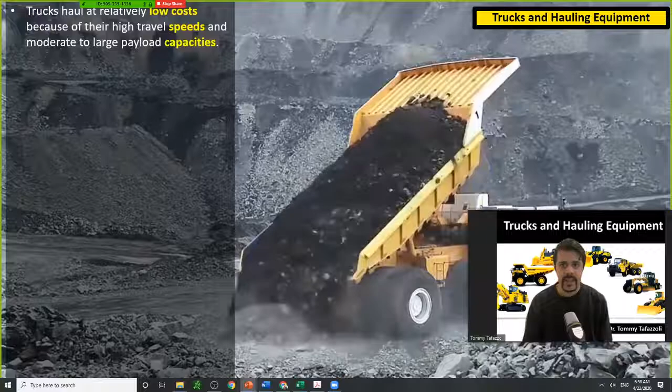Trucks are a very cost-effective hauling equipment due to two reasons: one being their relatively high speed, and two being their relatively high capacity. So they can travel fast and they can haul a lot of load, which makes them very popular in earthwork operations.

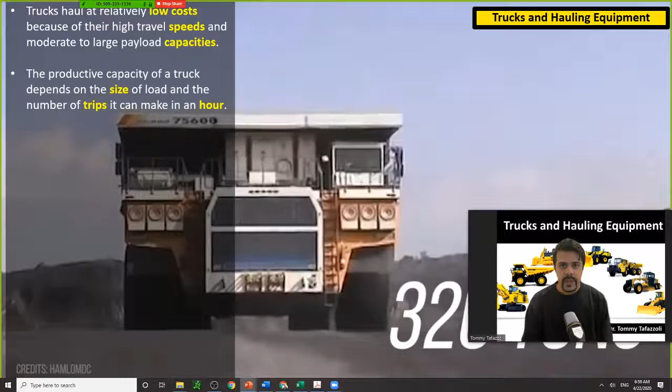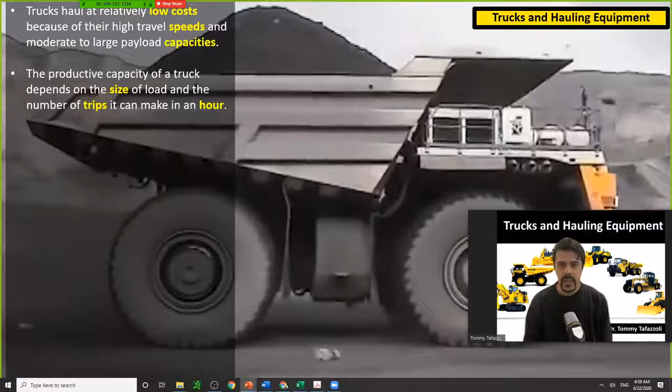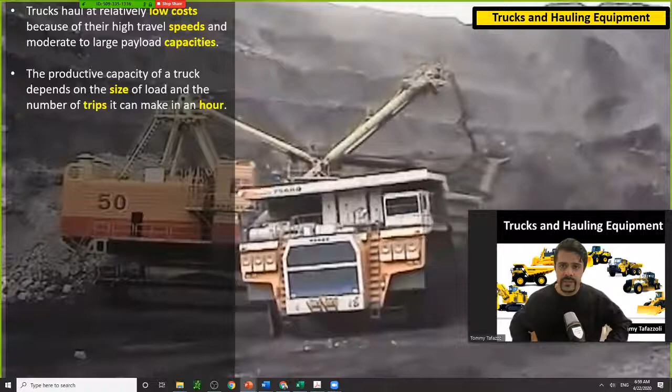The productive capacity of a truck depends on two things: one is the size of the load, which affects how many cubic yards you can process per hour, and two is the number of trips a truck can make in an hour. Based on the size of the cargo box and the number of trips, you can estimate how many cubic yards of load the truck can haul in an hour.

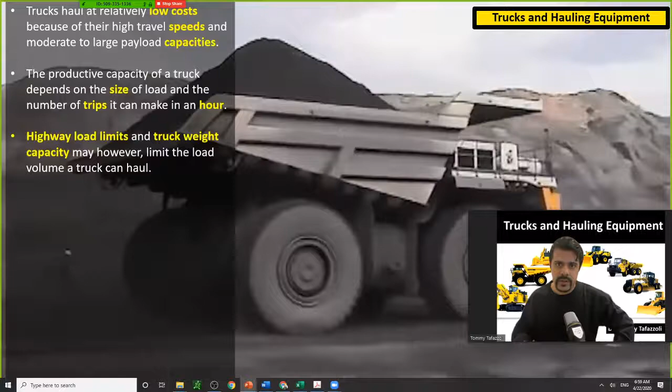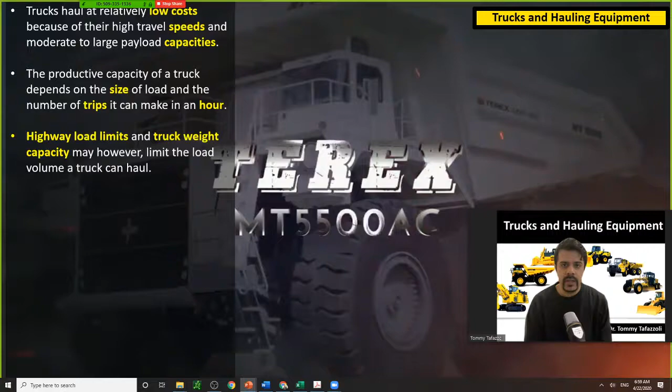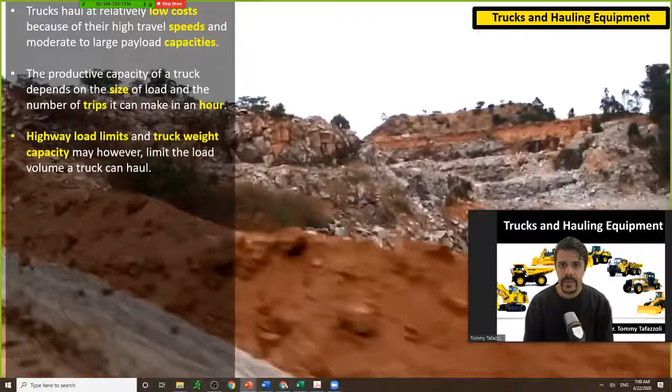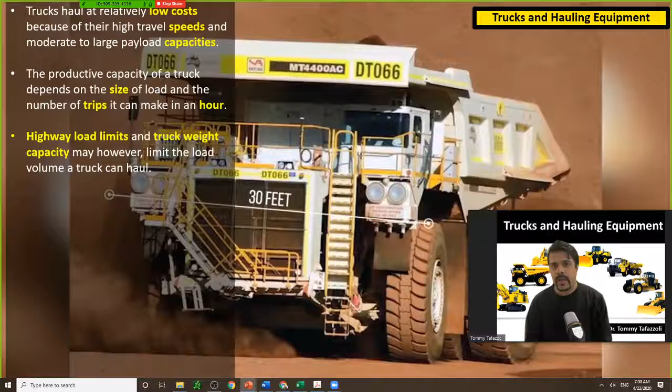There are some limitations. Even though your truck has a lot of capacity, it doesn't mean it can move on any highway, because highways have load limits you have to comply with, and there's also truck weight capacity, meaning the truck cannot get heavier than a certain number. You are limited by those numbers, even though volumetrically you could load your truck for a higher number.

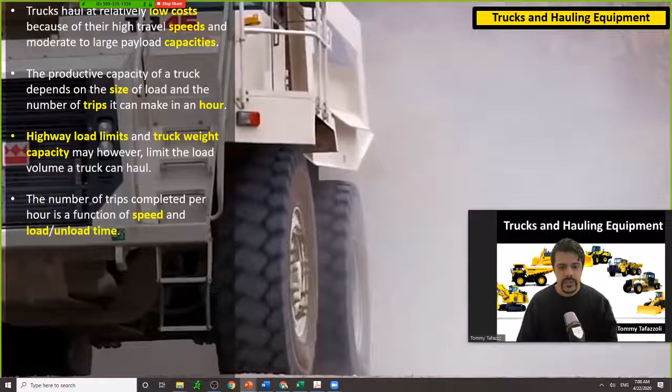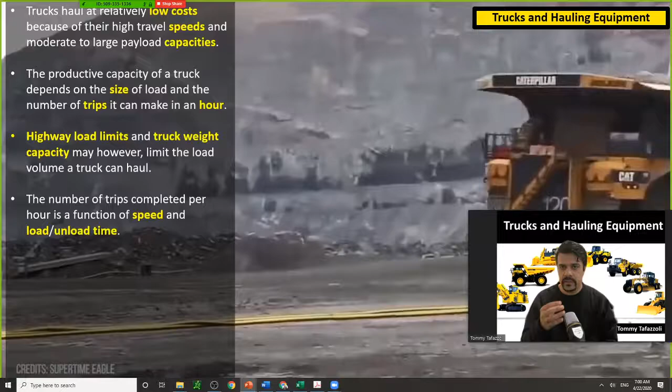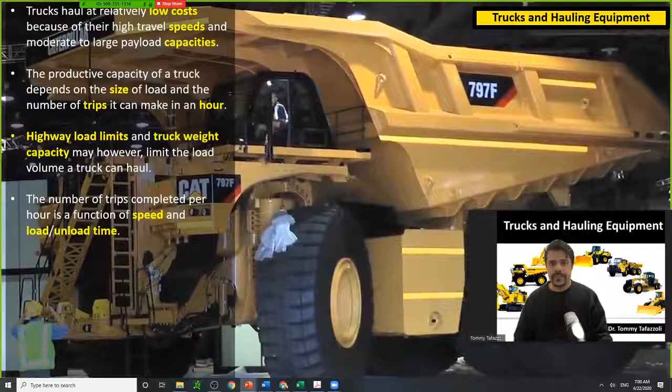The number of trips completed will depend on the travel speed. As a hauler, the truck has to travel, get loaded, travel back, and dump the load. So travel speed is one item, and of course the loading and unloading time is the second item of a cycle time.

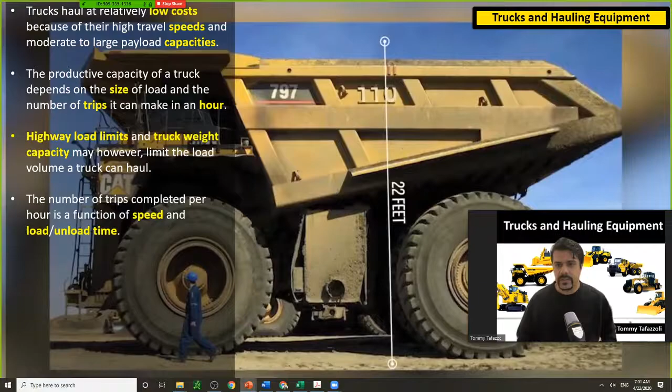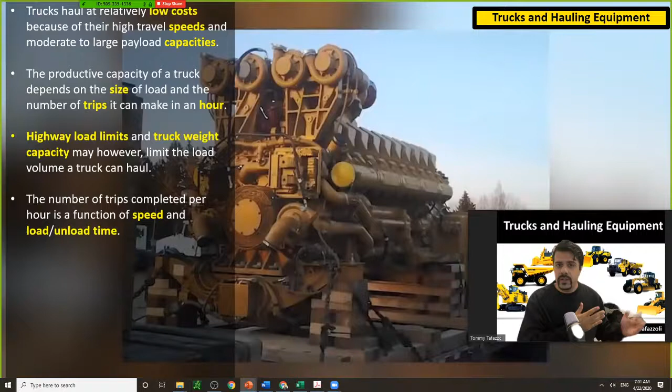The cycle time is basically: going to load, the loading, then traveling to unload, then dumping the load, and then returning to the initial location.

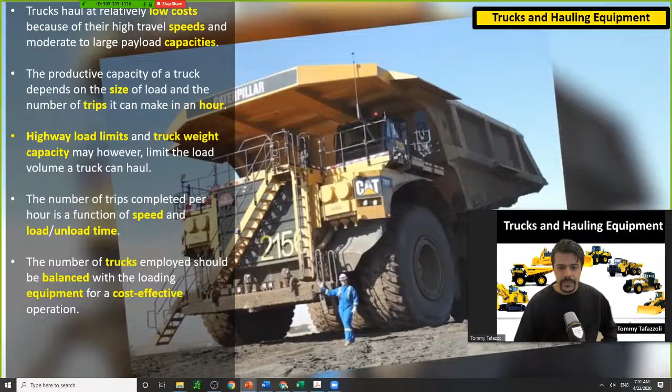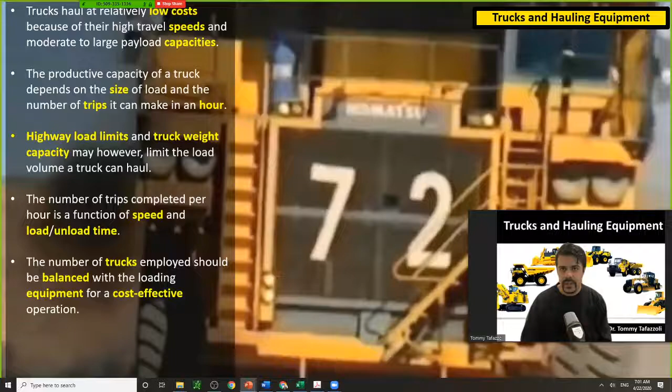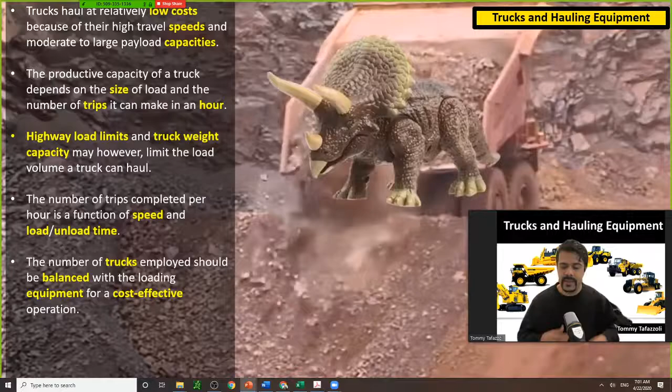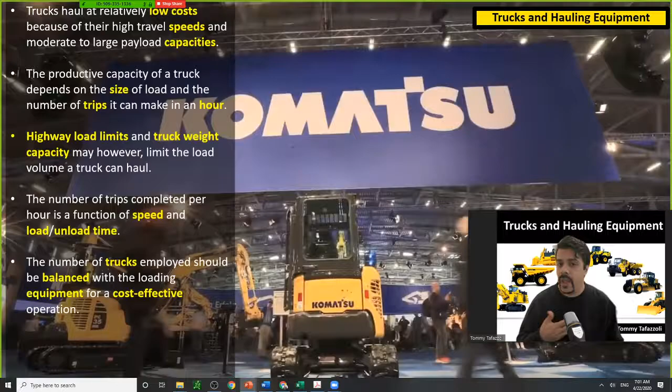The number of trucks is a big question for a contractor or project manager - they're interested to know how many trucks they would need. The best case, the optimum condition, is where your loading and your trucks are balanced so that your loaders are working at all times and your trucks are working at all times, and your equipment doesn't sit idle, because you're paying for them. Effectiveness means having your equipment functioning at all times.

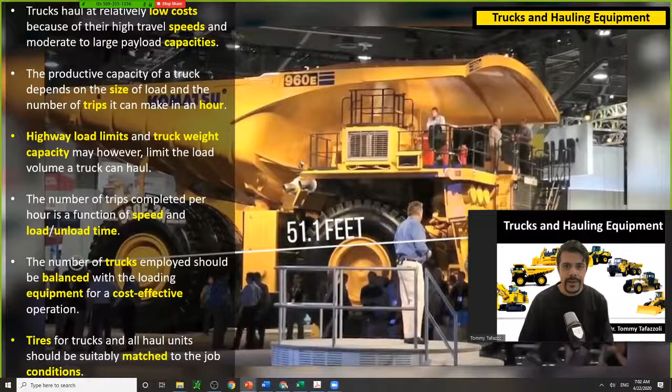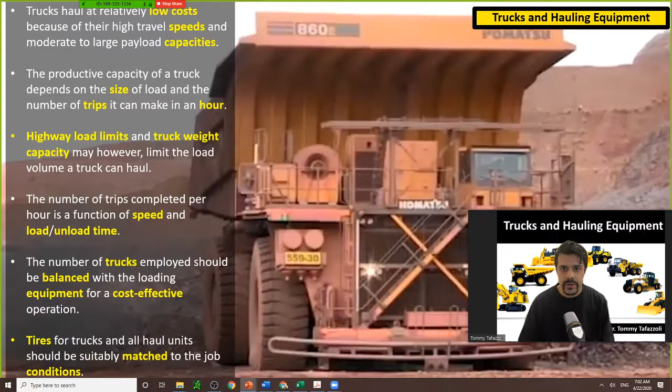Tires are a very expensive part of trucks. They include 35% of the maintenance costs of a truck, so you've got to be careful about your tires. Taking good care of the tires is primarily dependent on the amount of load you put on your truck, and that load should also match the site condition.

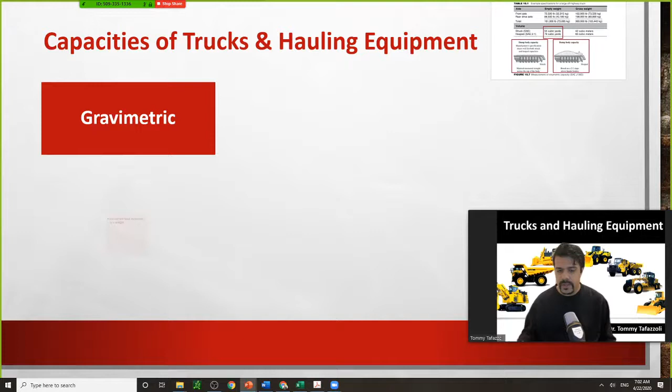Capacity of trucks and other hauling equipment could be presented in three different ways. Gravimetric means the load - if you weigh the load that is on the cargo box, how much will it weigh. But they could also be computed based on volume, in which case we have two different situations.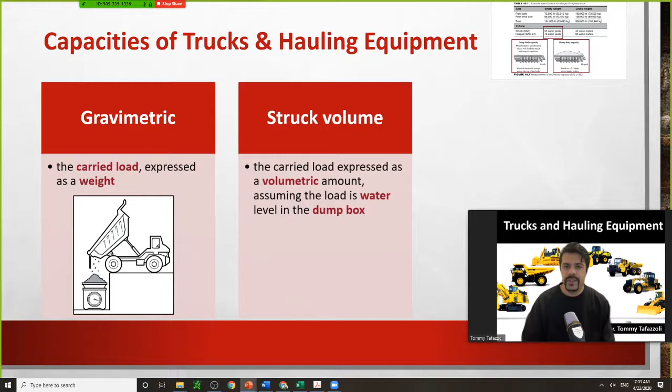If you remember, it's the same story we had for filling the bucket of a loader. The cargo could be considered a struck volume, which is when the load is level with the top edge of the cargo box. However, you can go for more - you can load your truck with the heaped volume, which is when you have extra load on top of the edge of the cargo box, and in that case you'll have a 2-to-1 slope above the dump box, and it will look like this.

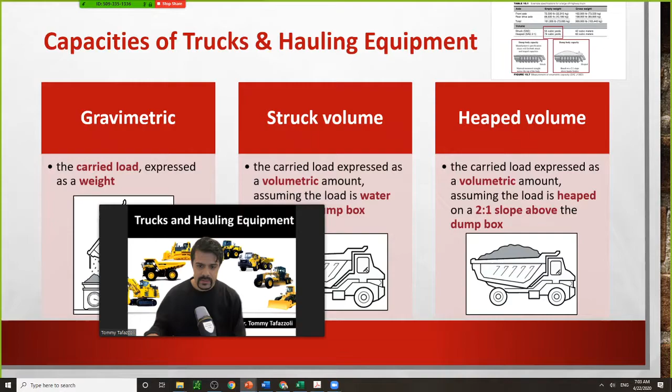There are tables that tell us the volume in different situations, struck and heaped. If you take a look, 55 versus 79, or 42 cubic meters versus 60 cubic meters, it means heaping the truck can significantly increase its capacity - as you can see, it's almost 50% more. The heap volume can be significantly higher than the struck volume.

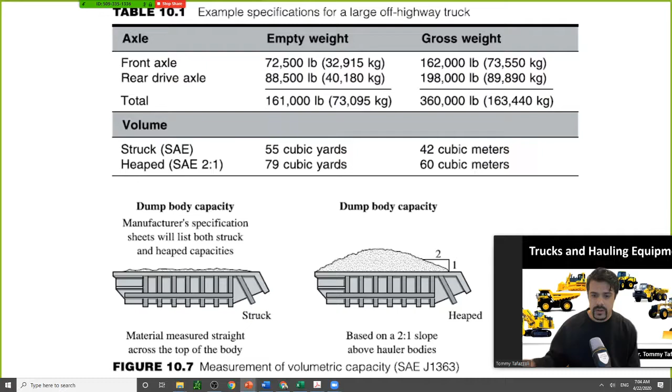So does that mean we should overload the truck as much as we can to make it cost effective? There are some reasons that tell us why we should not overload a truck. Number one is that when you overload a truck, there will be a lot of pressure on the tires, and this will create extra temperature on the tires. When that happens, the tires will get permanent damage, and obviously, when this happens, the operating costs of the tires will increase.

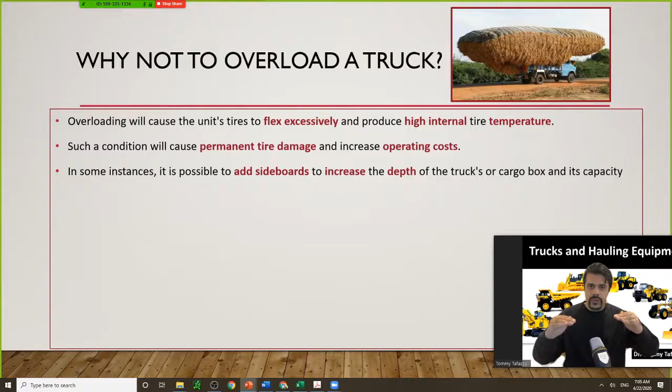So also, to add some capacity to your truck, you could heighten or increase the height of the sideboards. Sometimes they are adjustable, or they are removable and replaceable. You can add sideboards to increase the depth of the cargo box, and obviously the capacity of your truck.

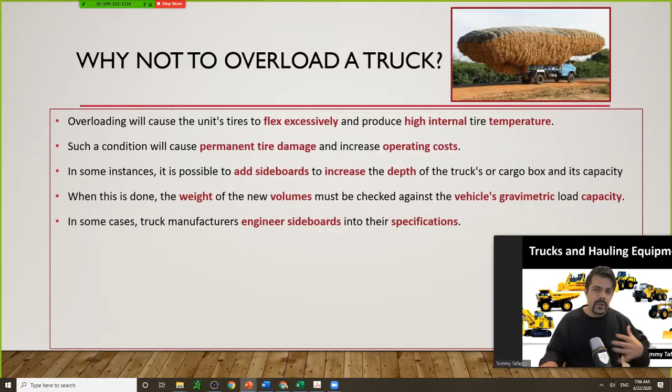When you do that, there is a limit. You should be careful that the weight of the volume does not exceed the vehicle's gravimetric load capacity. So in some trucks, the manufacturer will provide detailed information about adding or removing the sideboards,

and the maximum amount of load that is allowed when the sideboards are added. So if the added weight is greater than the gravimetric capacity, then most of the time your solution is not cost effective.

It means although you are adding to the capacity of your truck, you're not being cost effective. Why? Because you are adding fuel consumption, the cost of reduced tire life since your tires wear out sooner, and frequent failures of the machine - for example the axles, springs, brakes, and transmission could all wear out sooner, and that's additional cost for you.

But sometimes the additional cost on tires is marginal, while loading a higher amount of materials per trip could significantly lower your costs. That could justify the additional cost you are spending on tires. This is especially true where the hauling distance is long.

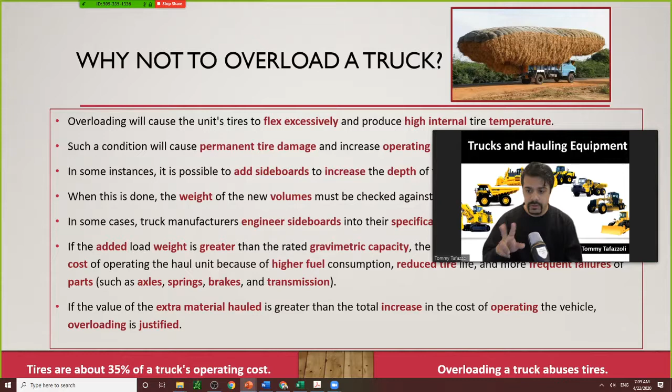So keep in mind that tires are about 35% of a truck's operating cost. That's huge, right? More than a third of operating cost for a truck is for its tires. And overloading a truck abuses tires. So these are the two important elements about overloading.

So many times you ask yourself: should I use smaller trucks or larger trucks? Obviously the number of trucks will depend on the capacity of each truck. If you have larger trucks, you will need fewer of them. But there are some disadvantages with each choice. Let's take a look at the disadvantages.

If you have a small truck, obviously you will need more trucks, and that creates labor cost for you, and loading issues, because a small target for the excavator operator will be available. It's a small box, and the excavator operator will have to spend time adjusting the bucket when dumping the load or loading the truck. Where you have a big or very large cargo box, the excavator has a lot more freedom to dump the load, so it could decrease the cycle time.

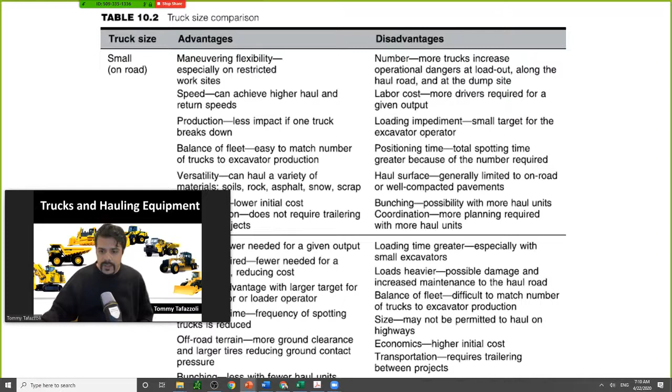Okay, so I'll let you read this chapter, this table. It explains some of the advantages.

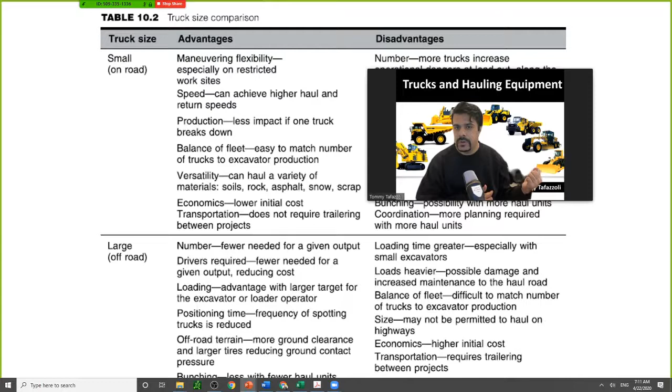Let's take a look at some of the disadvantages of large trucks. Loading time for them takes longer, especially with small excavators. So although you are spending a lot of money to use a bigger truck, the second truck has to keep waiting - the truck behind the one getting loaded has to wait longer, because if you don't have big enough loaders, that can proportionally increase the time of loading.

Does that make sense? Let's say you have a very large truck but small loaders. They have to dump a lot more buckets to fill the truck. And you're not working with only one truck - there's a queue for trucks. The second truck and the third and however many are waiting for the one getting loaded will have to wait longer, and you're paying for those big trucks. So this makes the process not cost effective.

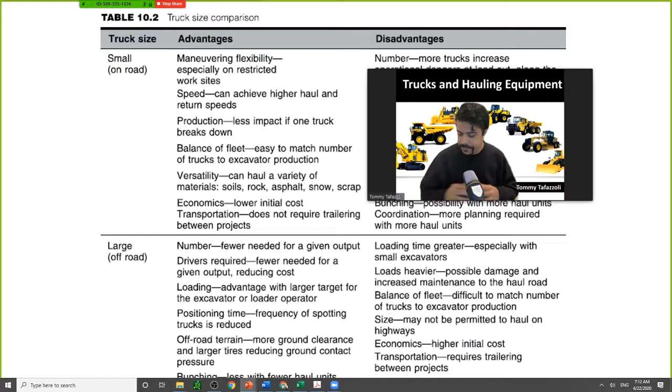All right, let's do a problem together. A loader operating at 107 cubic yard per hour - that is the cycle time of the loader, not the truck. First we need to find if you are matching the number of trucks. If you're given the responsibility of finding the efficient or cost-effective number of trucks, the first thing you need to do is find the loader production, which is given to us as 107 cubic yard per hour.

The loader has a 2.5 cubic yard heaped capacity bucket. So each time it loads the truck, it will unload 2.5 cubic yard of materials. It has a 1.2 minute load cycle, so it takes more than a minute for the load cycle of the loader.

The trucks have 11 cubic yard capacity and a 30-minute dump plus haul plus return time. So we have all the elements of the cycle time for the truck and for the loader. A 95% fill factor applies to the loader, so not the entire 2.5 cubic yard capacity will be utilized - 95% of that will be utilized. And the project works 50 minutes per hour, so we consider 10 minutes in each hour not efficient minutes.

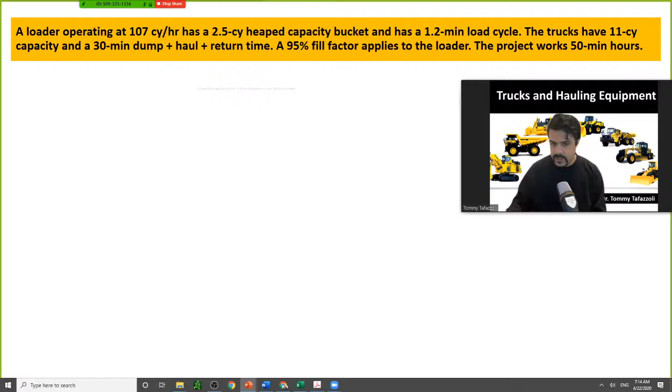So let's solve this problem together. First, you need to find the number of buckets that can fill one truck. Since you have the capacity of the truck cargo, which is 11 cubic yard, and the capacity of the bucket, which is 2.5, by dividing that you can find the balanced number - how many buckets in each cycle you're using. That's 4.4 if you do the math, but you round it down to be on the safe side, so let's say four buckets, and that compensates for the fill factor most of the time when you round down.

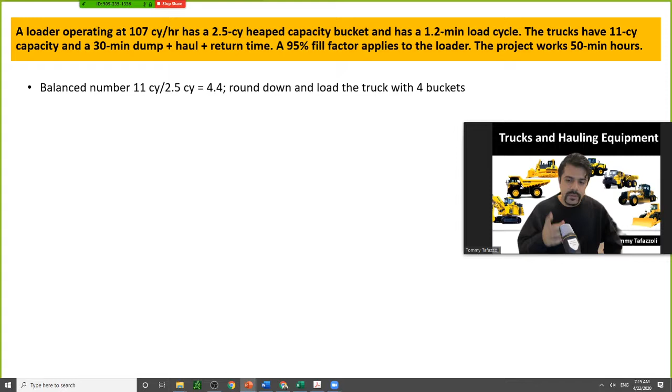Yes, you might say only 95% of the bucket is getting filled, but you round down. And also, in another part of the problem, we take 95% into consideration. I'll show you that in a minute.

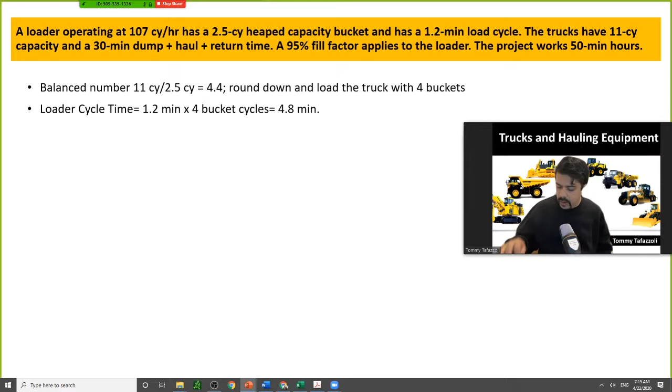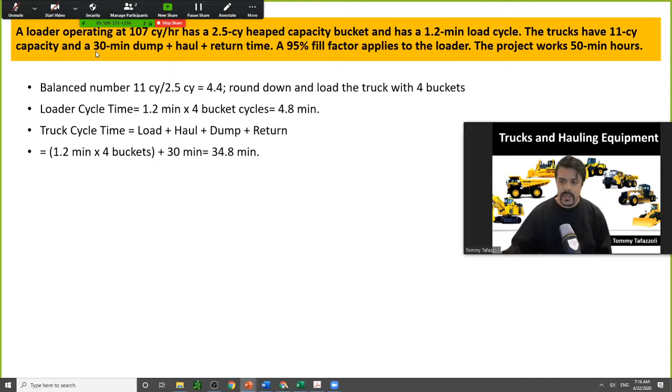So for loader cycle time: the loader takes 1.2 minutes for each bucket, and we know we are filling 4 buckets. So that would take 4.8 minutes for 4 buckets to be unloaded, or to load the truck. Truck cycle time will be the loading plus hauling plus dumping plus return time. That's 1.2 minutes times 4 buckets - we already found that up here - so we know 4.8 minutes is the time it takes to load the truck, and the haul plus dump plus return was given to us as 30 minutes.

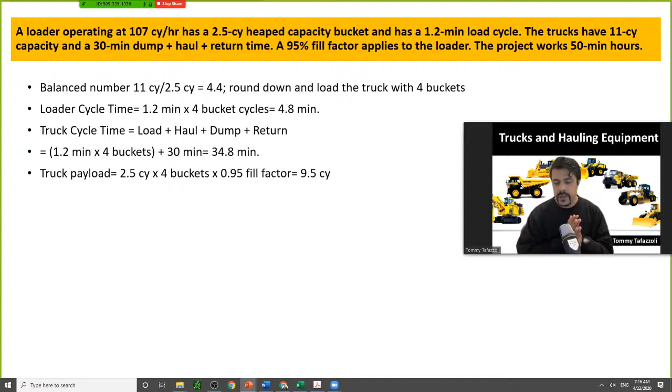So if you add them up, one cycle of the truck would take 34.8 minutes. The truck payload is where you consider the fill factor. We had a 2.5 cubic yard size bucket for the loader, and there will be 4 buckets - in one cycle you could do 4 of them, but with 95% of the bucket filled. This is the amount that you are hauling in every cycle by your truck. You have 4 buckets, each one being 2.5 cubic yard, but 95% of your bucket will be filled, so the entire amount in one cycle for the truck would be 9.5 cubic yard.

So truck production is how many cubic yards you can haul in each cycle - you can haul 9.5 cubic yard per cycle. How many cubic yards you can haul per hour will tell you your production. So in each cycle you can do 9.5, and each cycle also takes 34.8 minutes. You should divide those two numbers, and you should not forget the adjusting for efficiency.

Only 50 minutes out of 60 minutes is being efficient, so you multiply it by this number that will reduce the production because of losing 10 minutes. The answer would be 13.7 cubic yard could be hauled by this truck in every hour. So that's the production.

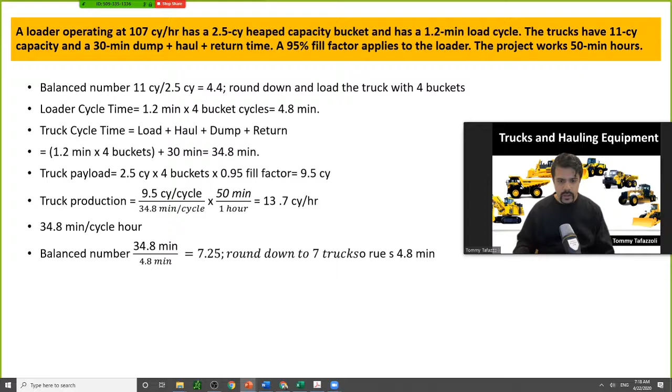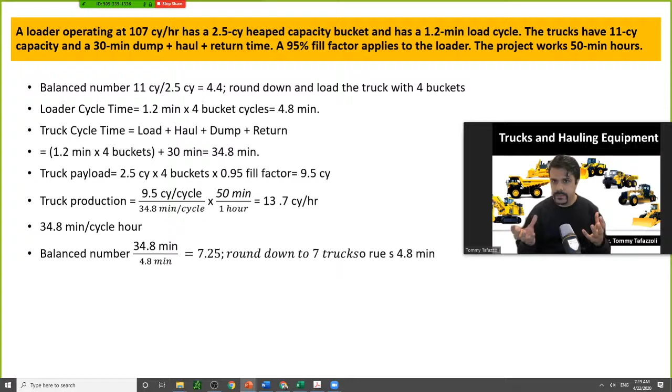Now let's balance the number. We found that loading takes 4.8 minutes, and the entire cycle time is 34.8 minutes. If you do the math, it takes 7.25 - you round it down because it's close to 7. It takes 7 trucks to match the loading time, to match the loader.

So each truck added to the job will increase the production by 13.7, because we just found that each one truck can do this amount of load in every hour. However, the loader will control and limit the total job - if you have a lot of trucks, the loader will not have enough time to load them. So we just try different numbers. Let's say if we have 6 trucks, each truck can haul this much load.

And if you have 6 of them, this is the entire total amount you can haul per hour. If you go with 7, that would be this much. If you go with 8, that would be this much.

So as you can see, we found number 7 to be the optimum number. Why? Because once you reach 8 trucks, the amount that needs to be loaded on the truck is 109.6 cubic yards per hour, but we know the loader can only do 107 cubic yards per hour. So your additional trucks will be useless.

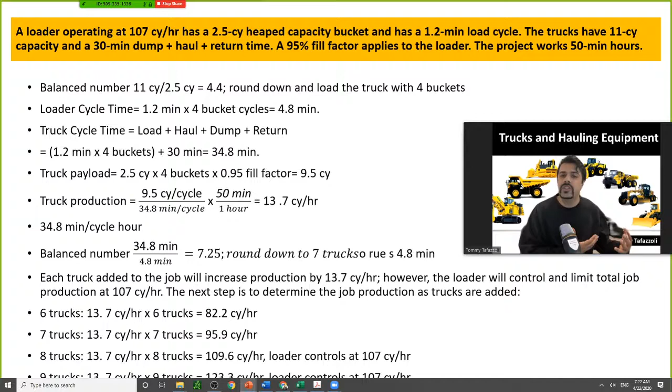This is not actually part of the problem, we just checked what happens if we pass 7 trucks. It would be between 7 and 8, but if you go with 8, that will exceed the capacity of the loader's production, so your loader will sit idle with 8 trucks or more. And with 6 trucks or less, your trucks will sit idle, because the loader is busy with the previous one and the second truck has to wait for the loader.

All right, so let's talk about truck safety as the last part of this lecture.

It makes sense that you do a hazard analysis or assessment every day, because every day your site condition might be different depending on the people, the equipment, the congestion on the site, and the operations you're doing. You should ensure that the operators and drivers are aware of the hazards. For example, today we are doing this operation at the north side, or the soil stability could be compromised due to XYZ. You should explain that to the operator and driver, so they have a good understanding of the hazards every day.

Every day that they are on the job site, ensure berms are adequately built to prevent trucks from exceeding boundaries at dump locations. That's also an important thing.

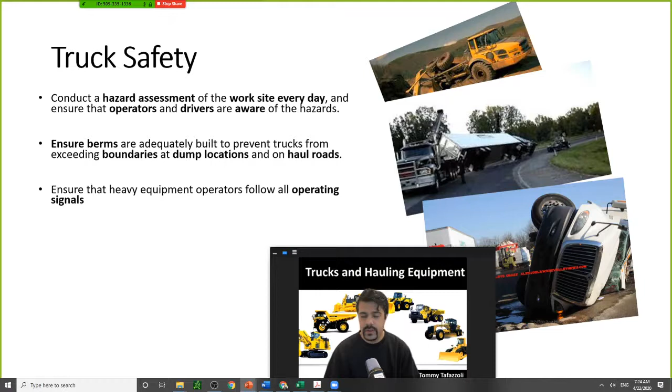Ensure that the heavy equipment operator follows the operating signals. You should provide, especially in big projects where you have a lot of drivers, some signals and signs for your drivers to know what they have to do. For example, in many projects, trucks have to wash their tires before leaving the job site, so you put signs to make sure that gets done. Look at this guy.

Use a spotter when backing heavy equipment. Obviously, for all the big equipment, there are large blind spots, and the driver or operator might not see the people working behind. The people working behind many times cannot hear equipment backing up, because the construction site is normally very noisy. With all that noise, you're not aware that a big piece of equipment is approaching you. So spotters are very important, and most of the time they are in place.